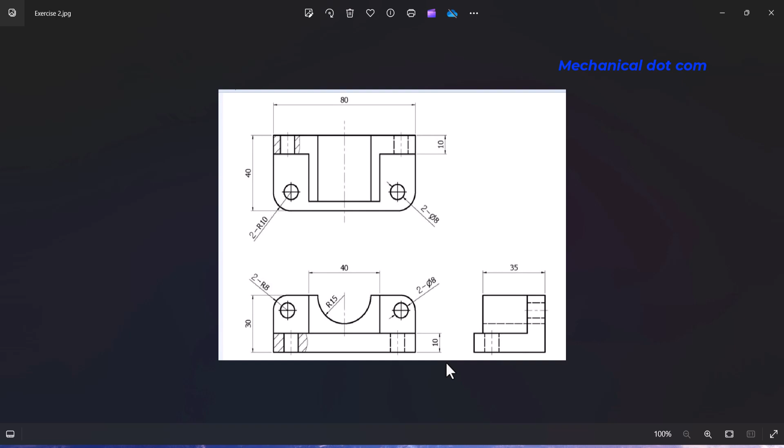First of all, see its 2D drawing. This is the 2D drawing. First of all, we will make this view. All the dimensions are in millimeter, and let me tell you the dimensions in detail.

From this point to this point the distance is 35 mm and also this length is 10 mm, so this will be 25 plus 10 which is equal to 35. From this point to this point the distance is 25.

This means when we sketch these lines, we will use extrude boss base and extrude them 25 mm. Also, there are two circles. The circle has a diameter of 8 mm and these fillet radius are 10 mm. Also, these fillet radius are 8 mm and the two circles have a diameter of 8 mm.

The distance from this line to this line is 40 mm and the radius of the half circle is 15 mm, so the diameter will be 30 mm, and the total height of this model is 30 mm. So this will be 30, and this distance from this point to this point is 40 mm, because this is 40 mm, so there will also be 40 mm, and the width of the whole model is 80 mm.

So this is our 2D drawing, and now let's start our video. Go to Solidworks, open a new part file.

Make sure that the unit system is MMGS system, millimeter, gram and second.

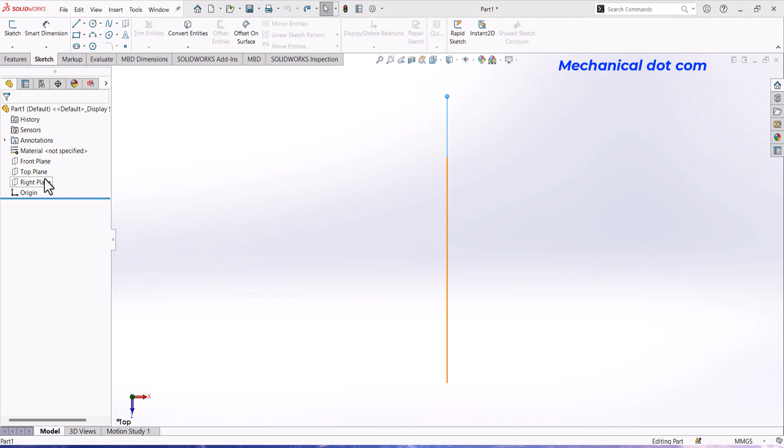Now go to right plane and normal. Go to sketch and then line command, and then draw lines like this.

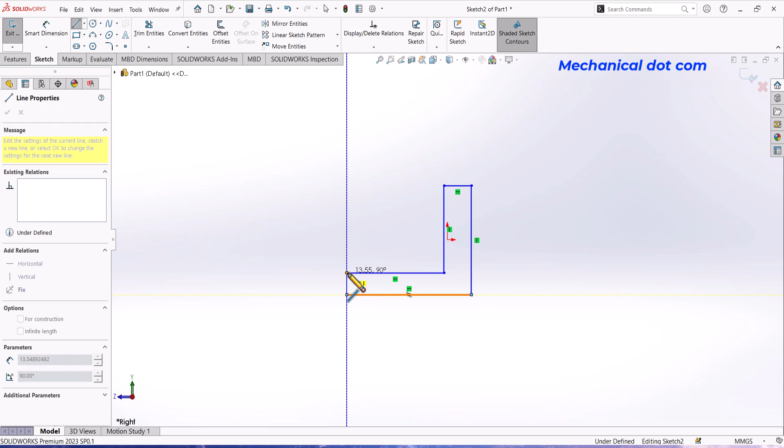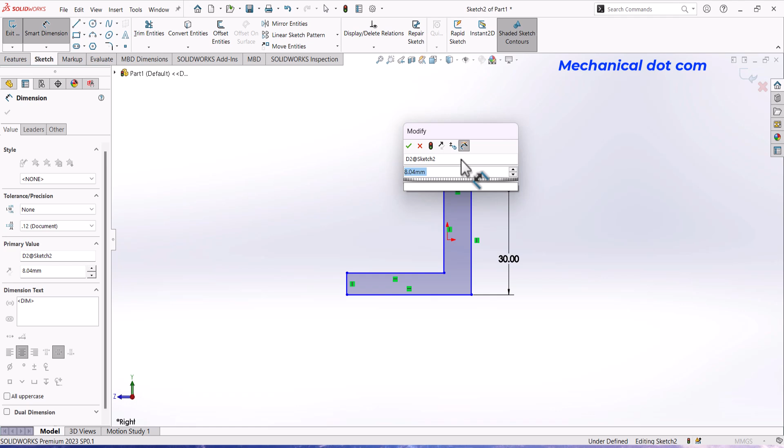Now use smart dimension and give them proper dimensioning. This length is 30 mm. This length is 10 mm. The total length is 40 mm. And this height is 10 mm.

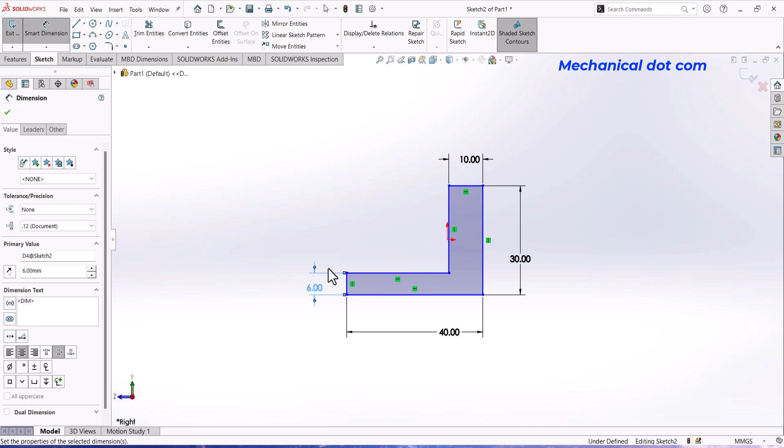Now go to features, extrude boss base, reverse the direction and type here 80. Click OK. Control 7, this is our isometric view.

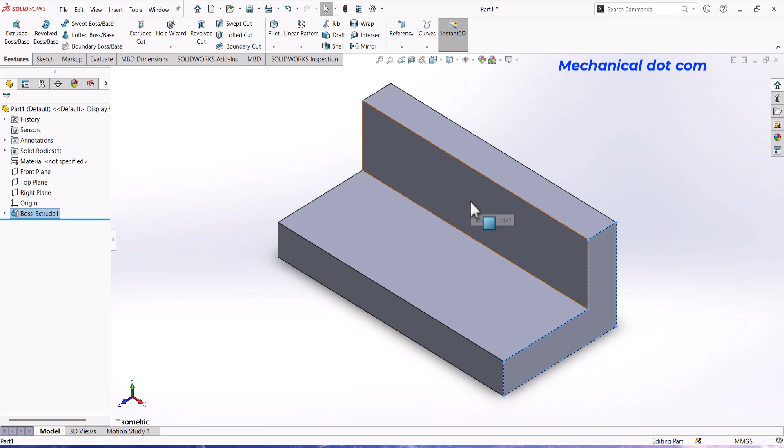Now select this face, sketch. Now we will draw a corner rectangle and a circle in the center of that rectangle. First of all, draw a corner rectangle.

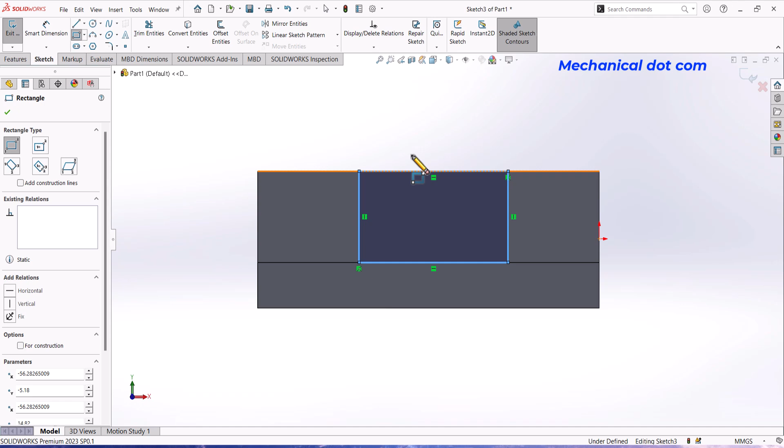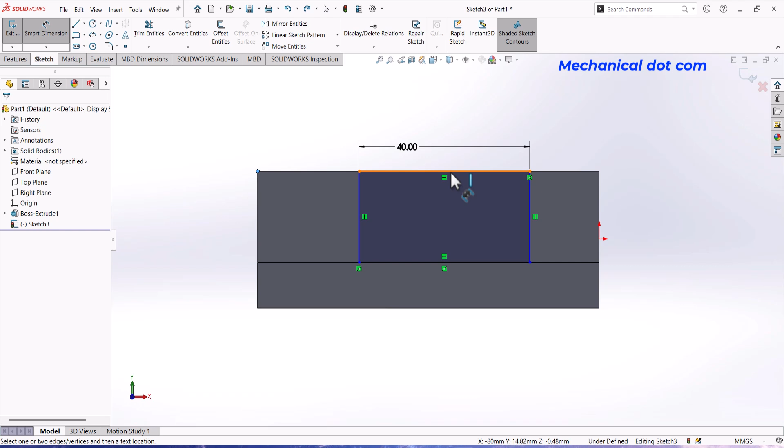First of all, go to smart dimension, and this length is 40, and also measure from this point to this center as 40 mm, because 80 is the total length, so 40 will be its midpoint.

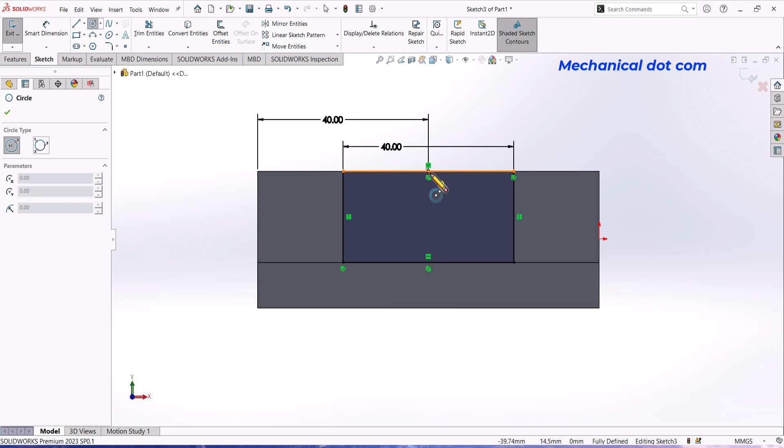See, now this is in the center. Now draw a circle from the center. Go to smart dimension. The circle has a diameter of 30 mm, or you can say the radius is 15.

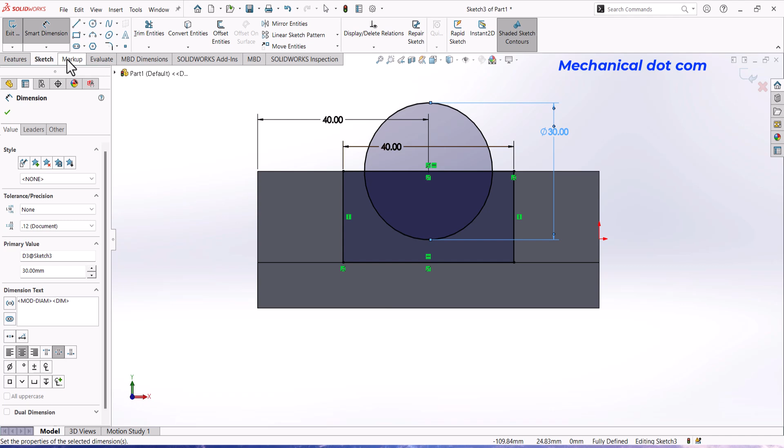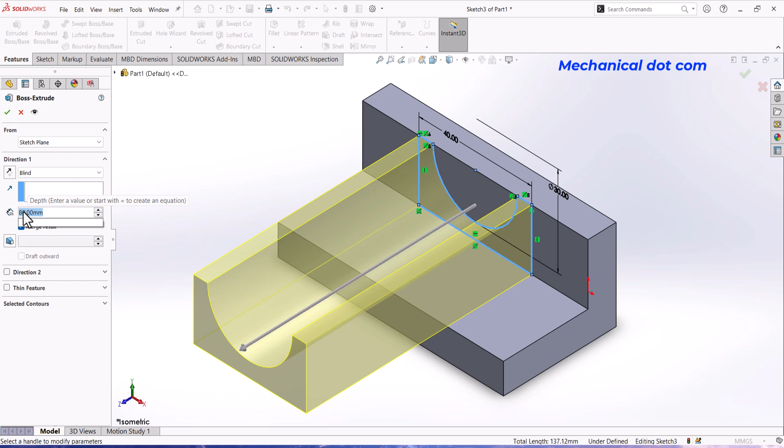Type 30 mm diameter. Now go to trim entities and trim these lines. Now go to features, extruded boss base, and select this face, and type here 25 mm. Click OK.

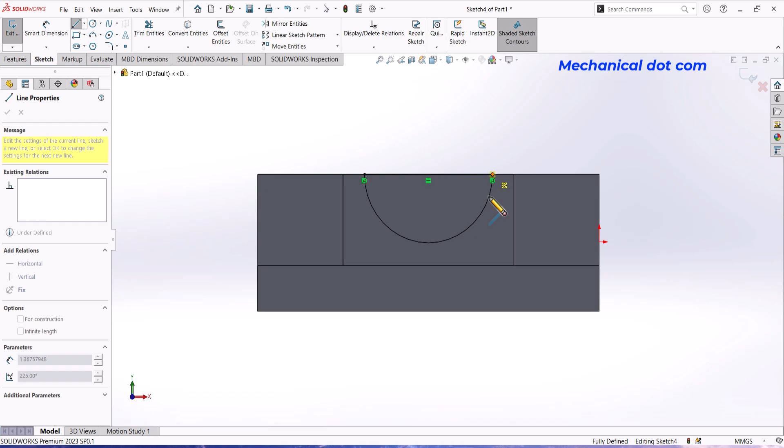Now we want to remove this material. So again select this face, sketch, and now line command from this point to this point, and again go to this point, and this will convert into an arc. Keep the arc on that circle, and OK. Now click OK.

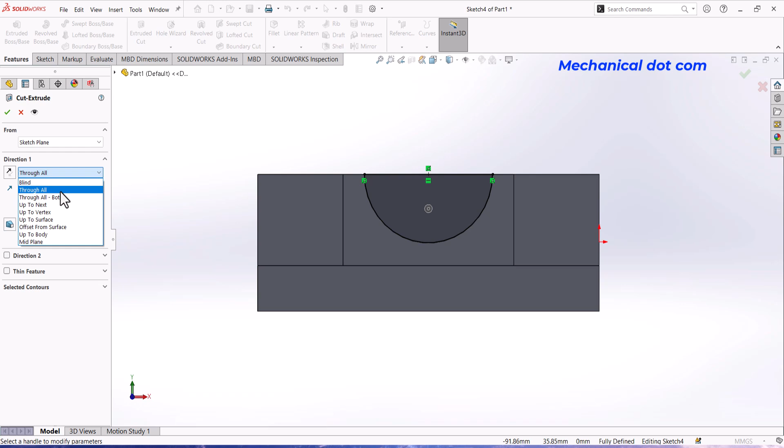Go to features, extrude cut, select through all, click OK. Control 7.

Now we want to fillet the corners, so go to fillet. The upper two have a fillet radius of 8 mm and the bottom one has a fillet radius of 10 mm. So first, for the upper side, we will type 8.

First select the upper corners and type here 8. Click OK.

Now again go to fillet. This time select both the bottom corners and type here 10 mm. Click OK.

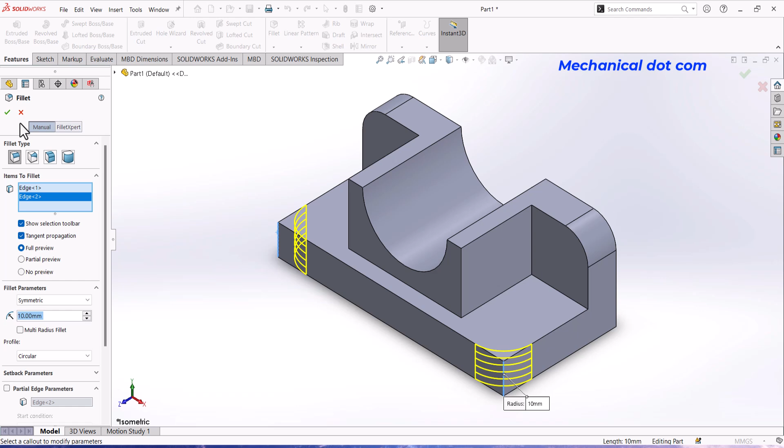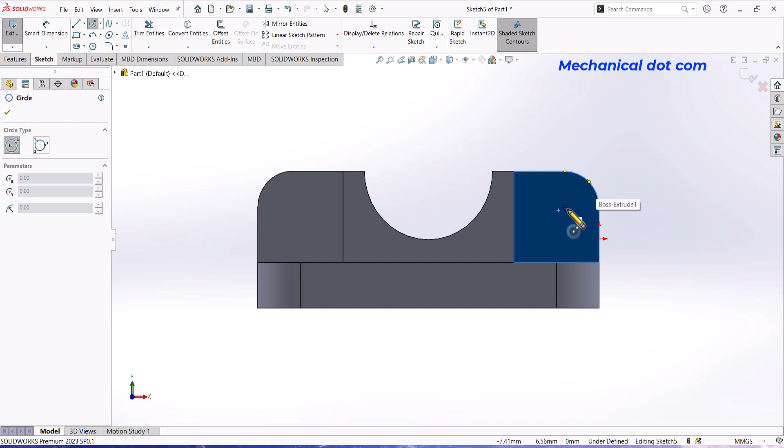Now we want to draw the circles. So for this purpose, first select this face, sketch, and go to circles. When you put the cursor on this point, you will see a plus point, and this is the center. So draw a circle, and also put the cursor on this point, and you will see the plus icon. Draw a circle right from there.

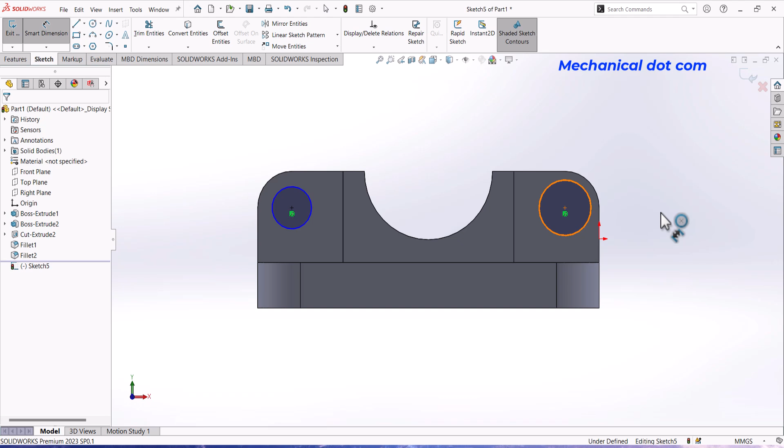Now go to smart dimension. Both circles have a radius of 4 mm and the diameter is 8 mm. This is also 8 mm. Click OK.

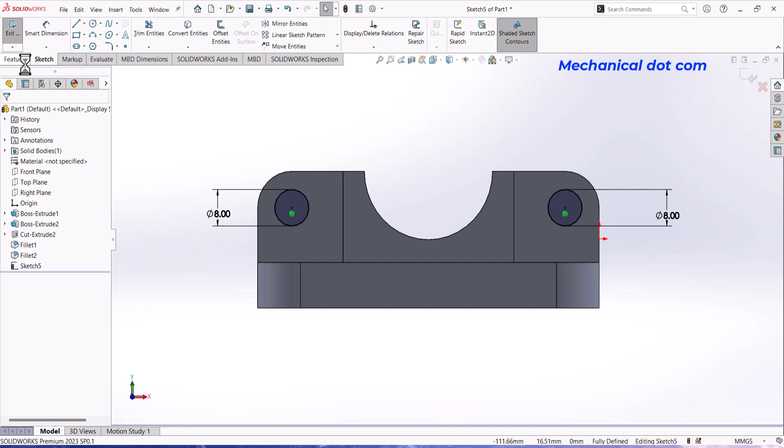Now go to features, extruded cut, and select here through all.

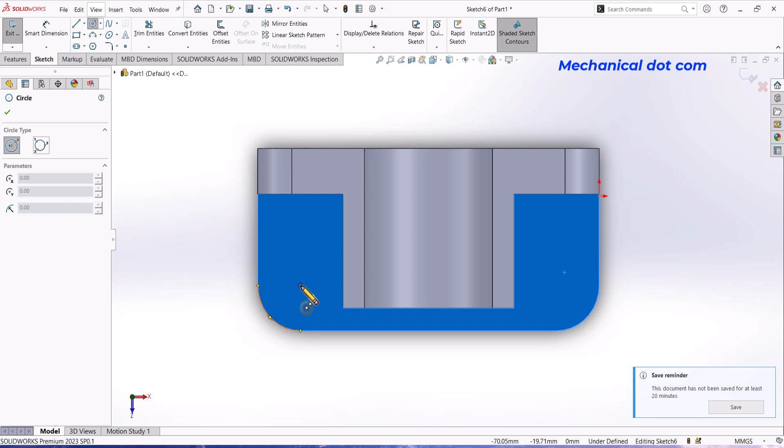Now select this face, sketch, draw the circles, put the cursor on this point and you will see the plus icon. Draw circles on both sides, put the cursor here and you will see the plus icon. Go to smart dimension, and the radius is 4 and diameter is 8, so type 8 for the diameter. Same for this circle, the diameter is 8 mm.

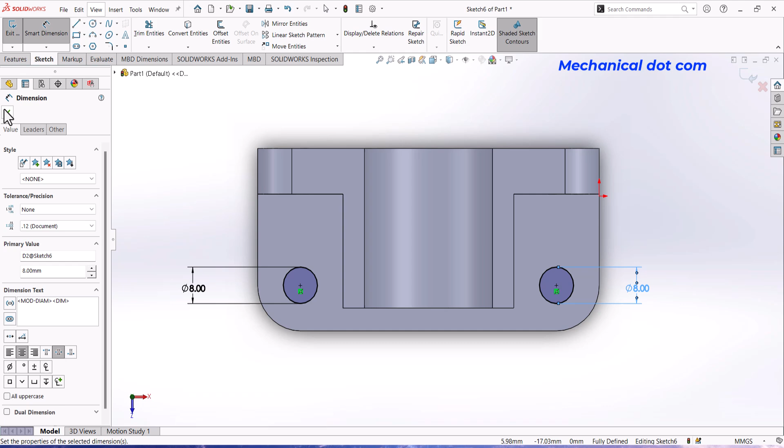Again go to features, first click OK, features, extruded cut, and select through all, click OK. Control 7. Our part is complete.

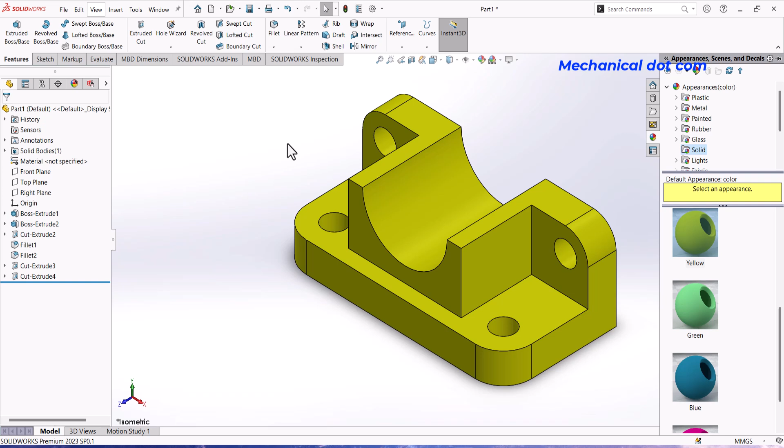Now go to appearance, go to appearances, colors, and then solid, and select here yellow. Click OK. This is our part.